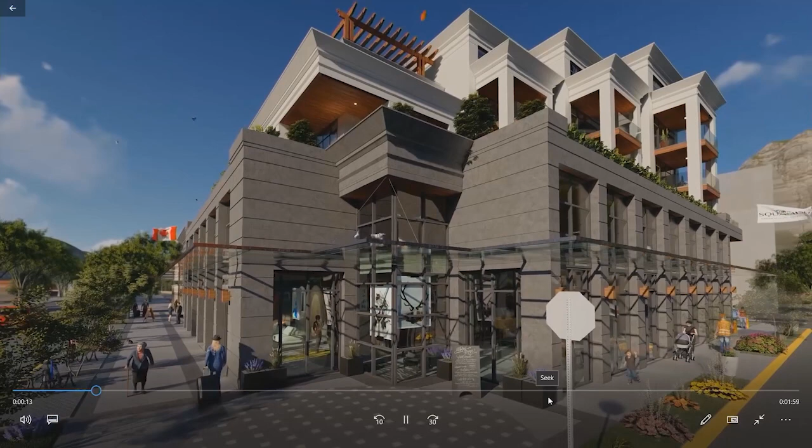This is an animation of what we had. This is the entrance of the building, which is a bit separate from the rest of the commercial. Units mostly have covered balconies. This is the top floor with some wood trellis. And this is the corner part that has a little intrusion with glass into it.

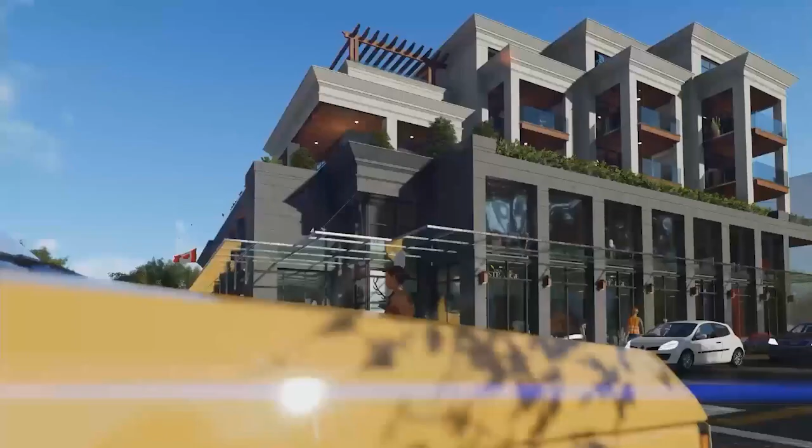This is the Winnipeg view, I mean the elevation from Winnipeg. And Winnipeg to Cleveland, you can see the corner and the entrance.

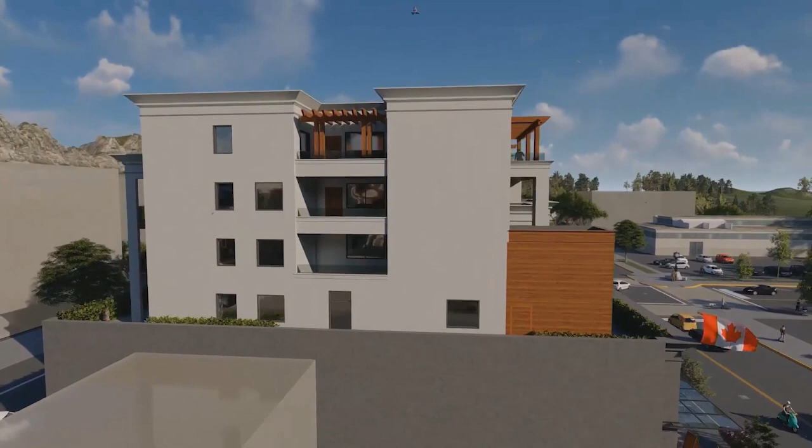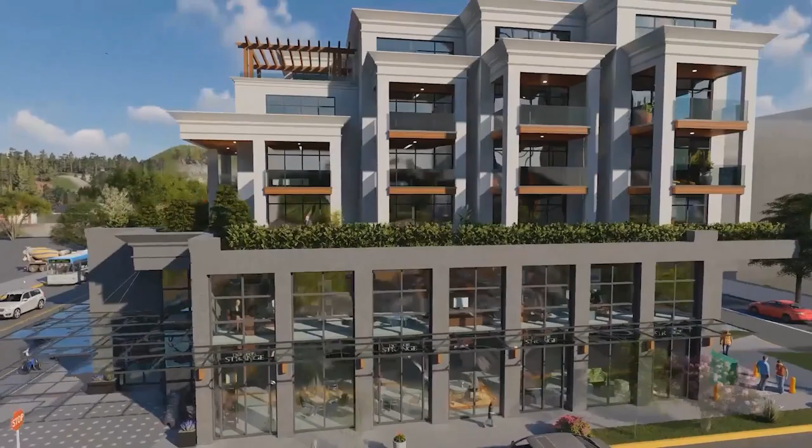Staircases are cladded with wood-like material. It's actually cementitious board, but it's textured and colored like wood. This is the parking, which has been covered with breathable green walls. It allows ventilation and makes it green as well, so natural ventilation for the parking.

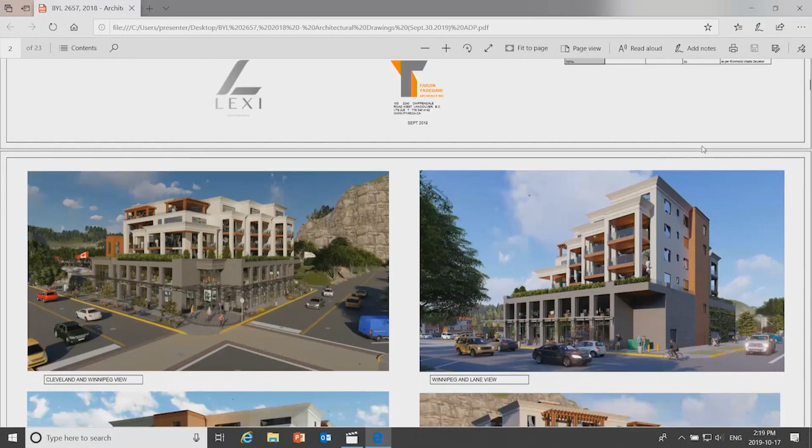I don't know if you need to go through this. This is the project data. If you need anything extra, I don't want to take your time. You have the perspectives and the site plan.

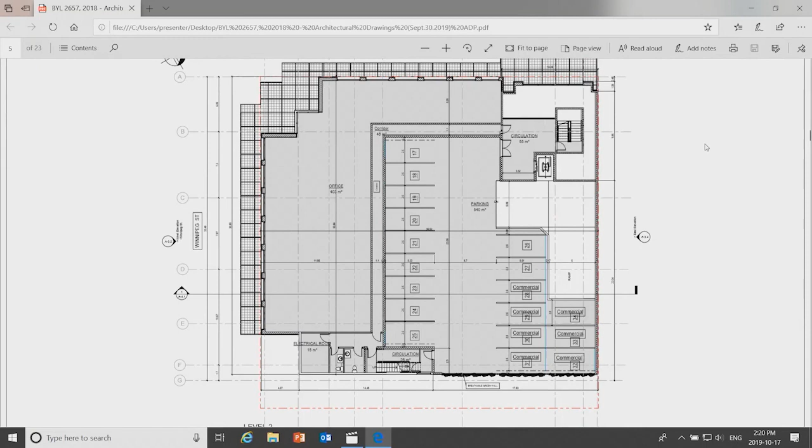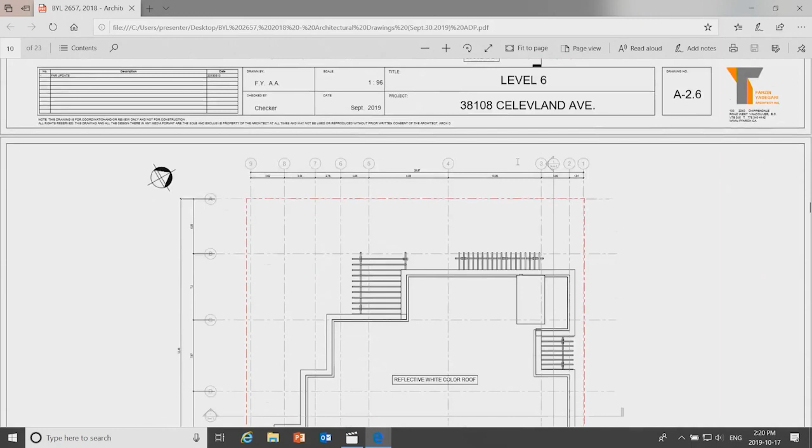This is the layout of the main floor, showing the commercial CRU and the parking, which is accessed through Loggers Lane. Upper floor has offices, units, and the amenity, the first immediate residential level over the parking. Basically we have typical floor plans on top, except for the very top unit, which has a larger unit. And this is the roof plan.

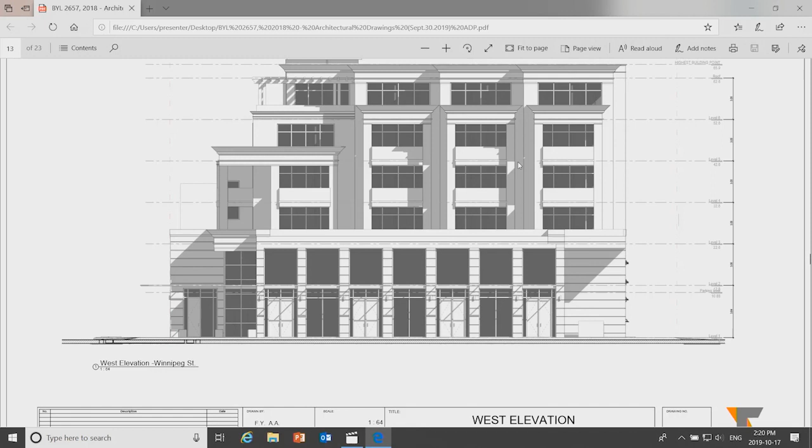This is the Cleveland elevation, with the colors, same elevation basically. Winnipeg, with the color. And this is Logger Lane, south elevation and entrances to the parking, with color. And this is the east elevation, with the color.

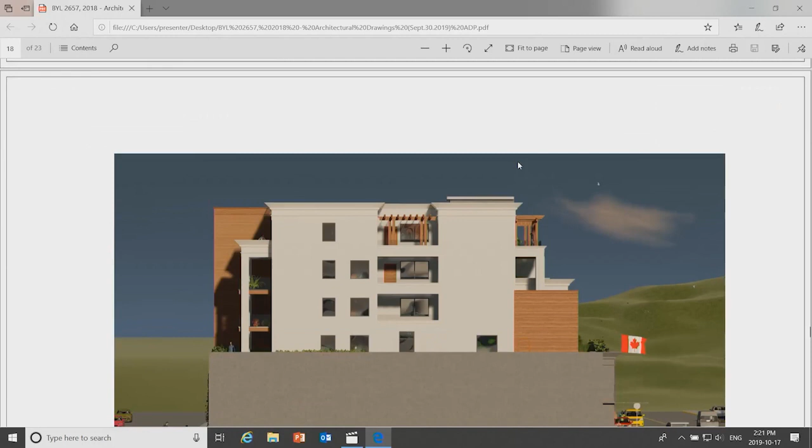A couple of sections. If I'm going too fast, let me know. And these are the colors and the materials.

The lighting, a bit small, but we have wood-look lighting at the street level with the sign. This is a bit too small, but we tried to enlarge it a bit, so it is continuous signage here, which meets the bylaw, with some lights next to each of the unit entrances.

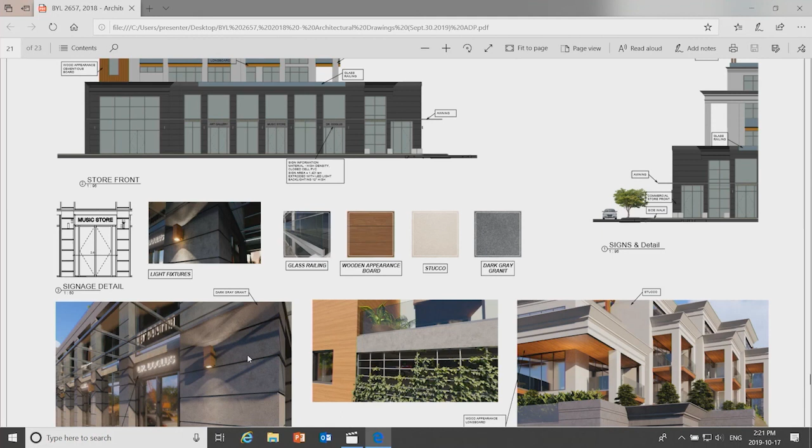Yes, the soffits are all wood-colored material, but you can only really see it here, you have to see it in the perspective. The soffits you can see in elevation, and it doesn't go up. Somehow the wheel doesn't work. Anyway, no, it doesn't go up, it just goes one way, I think. Where? Maybe here? No, it looks like it's just frozen. Do you want to just exit it? Sure, we can do it again.

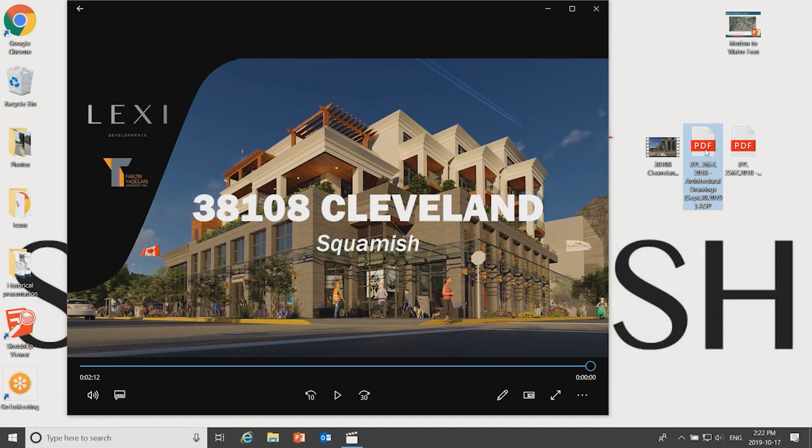Yeah, these are what Bob mentioned, the wood that we have. It actually shows a lot more in perspective, the soffits, on the right, top right. Right, all these are.

Anything else? Just some specifics about the 5 points. Well, but landscaping, let them ask questions. Yeah, this is basically to reply, trying to keep it.

I think we should also note that for the plaza, the landscape architect hasn't designed a final thing because we're at zoning, but our intent is to keep it flexible, because it might be that a corner tenant, like a restaurant or cafe, comes in and wants some seating. That's one thing. The second thing is we can keep the landscape, and as Farzin mentioned earlier, we're intending to have a public art piece, so there would be a whole competition following the district's rules on how we come up with the solution.

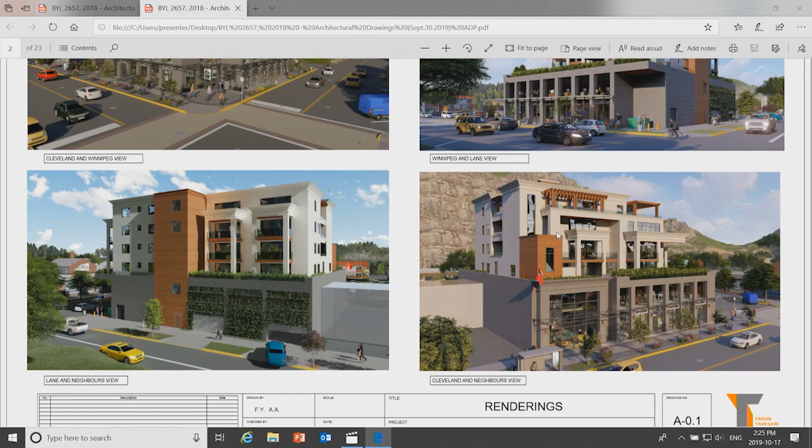I think that completes our presentation. Thank you. I'm welcome to your questions, please.

So we will have a round of questions. Start with you, Jenna. Sure. Could you speak a little bit more to the amenity space that's within the building?

Yes, absolutely. This is the space right next to the elevator, accessible to everybody, with a strip of outdoor amenity next to it. This is 54 square meters, and we can put a wet bar or kitchen next to it, or part of it may need a washroom so they don't have to go out. But this is what the bylaw requires, all one big space.

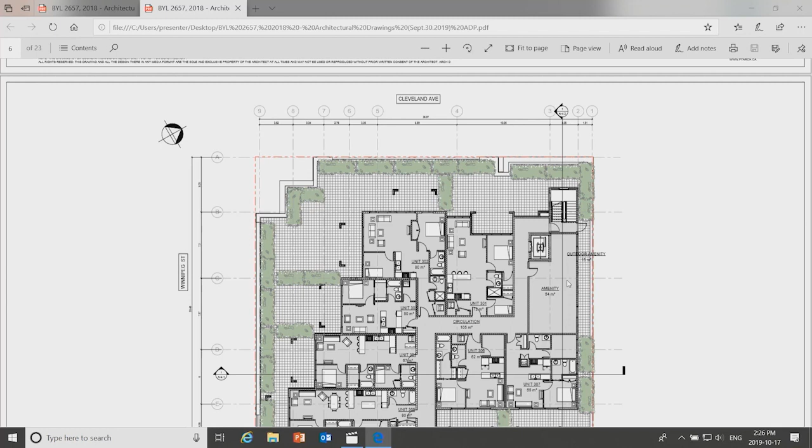I think the other thing we should note is that one of our challenges is that on Loggers Lane, when the owners bought the property, there was no registered right-of-way, so it was free and clear. Then, as they started to design, it was discovered there's a buried sanitary sewer that runs along Loggers Lane that's never been registered.

So that immediately, plus the hydro, introduces setbacks we have to deal with. In order to break up the architectural design, plus try to meet some outdoor amenity space, we created a portion 5 feet wide outside. So if you can imagine, on the outside, it breaks up the facade along Loggers Lane. That's one thing it does.

The second is that for an area to come out from sliding doors or whatever kind of doors, there's room for some seating or standing if there's a function going on in the amenity room. That's a good point. We had to increase the setback from Loggers Lane, based on discussion with engineering, to 3.72 meters, which is more than 12 feet, to meet the requirement because of the pipes that were buried and we were not aware of when we started the design. But the building has been pushed forward toward Cleveland to allow for that setback.

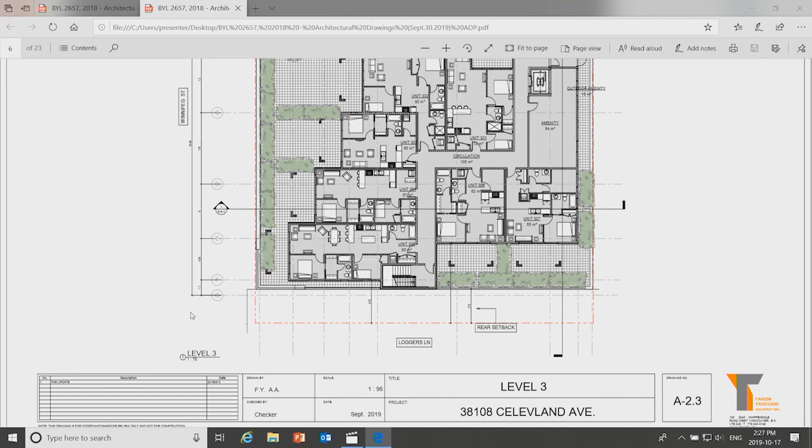With the overall form and character, could you speak a bit to the approach of having two quite different forms and characters with the top and the bottom, and the intent with that? Exactly, sure. The feel is, I wanted to have a very strong base, which is the commercial part, and then a lighter, more approachable residential feel above that plate. So I wanted a more formal feel for the commercial, and then more playful residential at the back.

Okay, thank you, no more questions.

Thanks. Can I just begin here with a question for Carrie? I'm feeling like it's very presumptive that we're looking at this site as a C4 site before it even goes to rezoning. So I'm just curious, having advisory design panel going into such small detail as amenity and whatnot, perhaps we should be looking at this street on a wider scale and commenting on density and massing, how appropriate or inappropriate that is for that corner, and whether or not this is even going to get close to a C4 or possibly a CD zoning as it goes through process.

But looking at the small details right now, we might be wasting a lot of time, so. The applicant has applied for rezoning to a C4 zone, so it would not be a CD zone at this time.

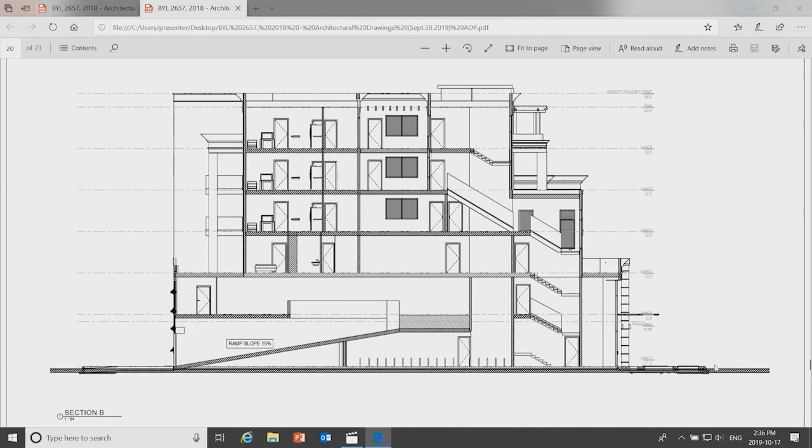Could you speak maybe to the granite, why the choice? I sort of feel that it's apt because of the old rocks that we have, and it feels somehow strong and durable, and reminds me of the rocks around here.

The wood trellises, do you think they're appropriate? That was part of it, to tell you the truth, in response to the bylaw requirements, and I felt it gives a bit of a softer look to the building at the top. Just discussion, I mean adding some wood, I think it helps soften the building.

The way the building is massed and stepped back creates what I perceive as a haphazard ratio of patios. Some seem to be covered, some not covered, some seem to be 1,000 square foot, some to be 2 foot wide. Could you speak to how they're divided up? Yes, these are actually all typical, an equal rhythm. Most of the decks on the lower floor are covered, except the very top floor. Could you show the plan? Yes, absolutely.

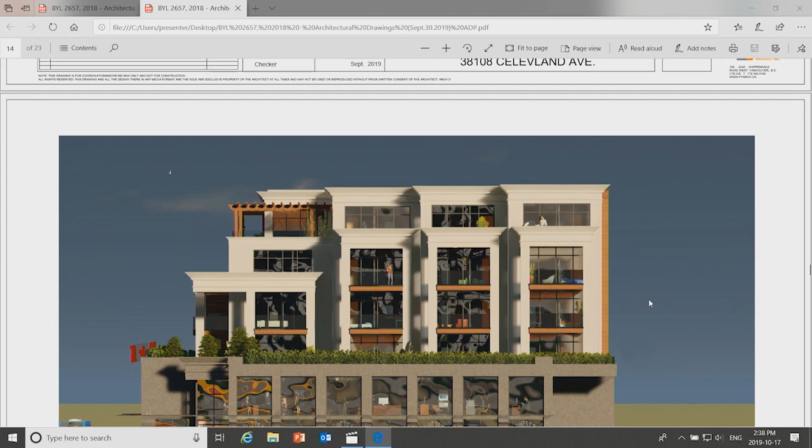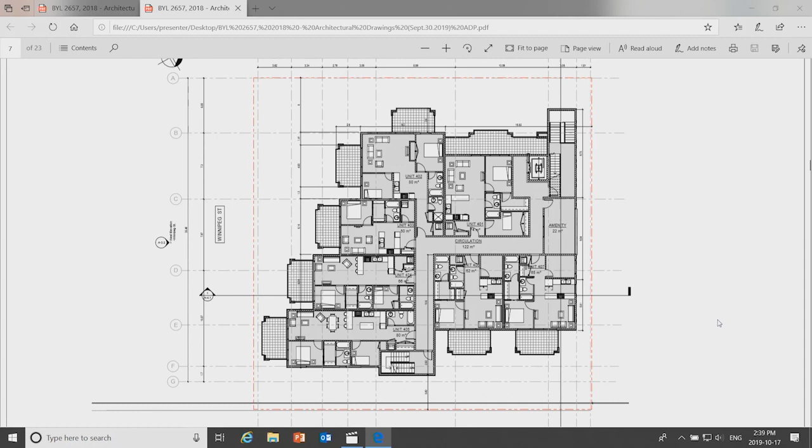This is the top floor, but this is the typical floor. So the units have decks that are covered, and the corner unit has a bigger deck. Maybe I should go one floor lower and see. Okay, here. So we have 2 units toward Loggers Lane with the deck, then 4 toward Winnipeg, and 1 at the corner, and only 1 toward Cleveland. It was basically trying to recess because of the corner. That was the goal.

And then could you maybe speak to the green credentials? You noted that it's going to be a steel building. And it's green. Does that mean it's spray foam?

It is not 100% finalized. There was a discussion, it's a good possibility to become light steel structure, and I have done it before. There was always challenges with condensation more than fire issues. The fire issue can be dealt with more or less. My concern is always with condensation with steel, especially with cantilever balconies. But we don't have cantilevers, we have posts, so I can somehow have the thermal break. But it's an issue I have to deal with because that's one of the requirements of the client.

Okay. Yeah, I have no more questions. Thanks. Graham? Oh, sorry, can I, Carrie?

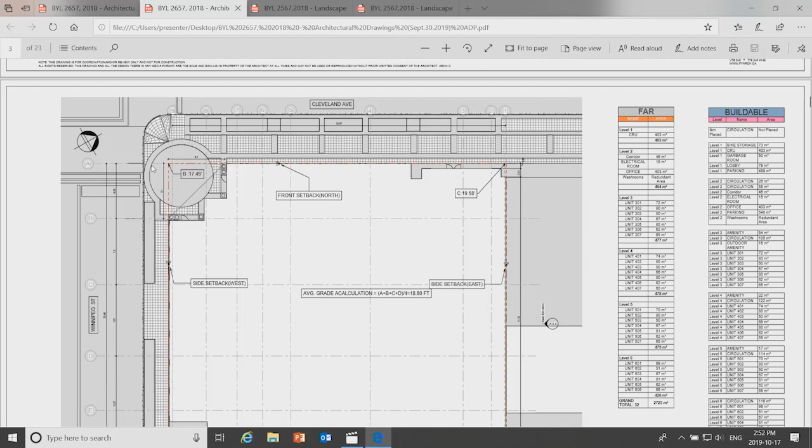I'm trying to find the dimension - this is about 9 meters across, almost a 30 foot diameter. And that's not taking into account sidewalk allowances? Yeah, it does, it was always factored in. So everything is about 9 meters. And there is an opportunity there - I know there's glass, but certainly in projects I've been involved in, you can go right up the building, either with tiles or something, and that would be part of the discussion.

Thank you, I have no question. Okay, thanks Sarah. Carlos?

Can you let me know, for page A6.1, the shadow study, what software did you use to model that? Revit. And do you have Squamish's topography data? Yes, absolutely, it's almost flat, but we did use it. I mean for the surrounding mountains as well - yes, that's right, we did, this is exactly what the mountains are there.

Maybe a question for staff - as far as I see there are 2 DPA guidelines we're talking about in relation to the plaza space. Could you elaborate a bit on your first point that it doesn't meet the guideline? Looking at the two guidelines referenced, if it's the size - the 9-meter size stated - is there something saying we need more, or can the district require more, or is it more aspirational that the plaza be larger from the district's perspective? Yeah, so there's a whole section under 3810 on corner plazas.

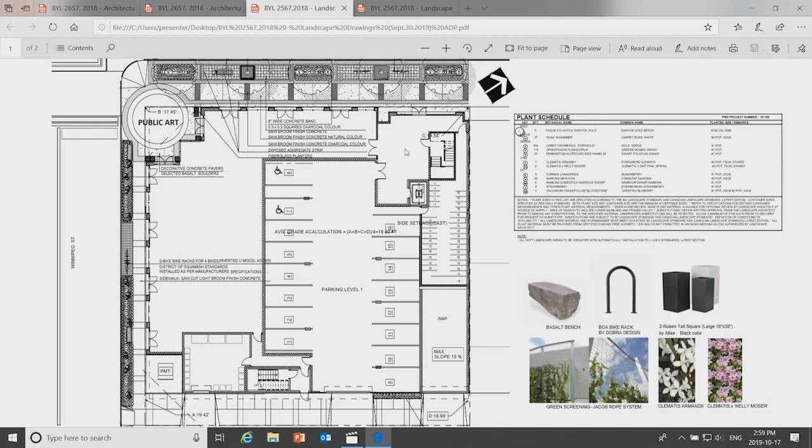Okay, and then you also mentioned that the public art plaza could also possibly work as cafe seating or something. So I'm just curious how that will work, how you would maintain it as a common area if it's being used by a private business.

I don't know if legally it has any issue with that.

Normally what would happen is you do a commercial strata for both the offices above and the retail at grade, and that'll be common area because it's on private property. So anything that's put in, whether it's art or a lessee for a cafe putting out seating, there'd be a restrictive covenant, and there'd also be within the strata bylaws who looks after it, making sure it's clean and everything's removed for nighttime and so on.

And would that preclude it from complying with the development permit guidelines then? If it all of a sudden isn't common, it's now private? I mean, the idea, if I understand correctly, is to animate the street, and that's one way of doing it for sure, is to have outdoor seating.

I can speak to that a little bit further, let me just refresh my memory on that. I can ask my other question. Sure, go ahead, that's the last one I think.

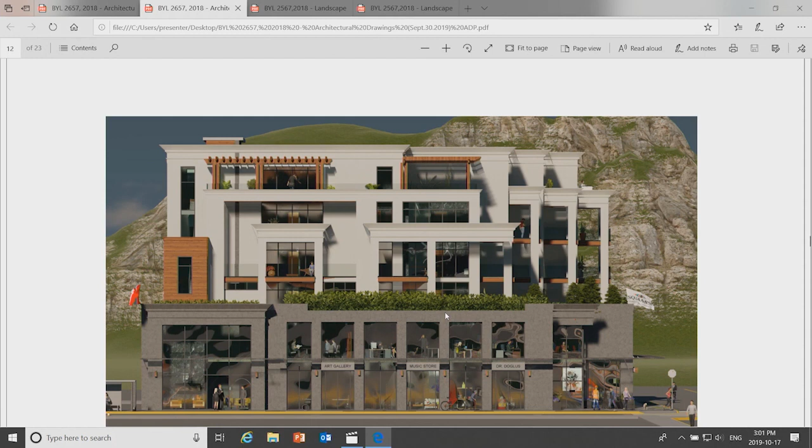Okay thanks, Carrie, did you want to add in? Yeah, so we do have a guideline in our development permit guidelines, 3811, privately owned public space, and it speaks to privately owned public space should have a public right of way registered on title to ensure public access at all times. So we do have that, it's a guideline, and we've used it in different cases where it's more applicable. At this point it's something we haven't considered for this, but it could be.

Okay, so it'd be something to consider. I have one more question. Is there any consideration for employee housing or employee restricted housing here for the residential, or is it all market? Condo?

Okay, I'm not going to ask any questions because I've already asked my main question. So we'll go to comments, and I'm hoping that we can move around the table a little more quickly this time if possible, and we'll start with Jenna.

So for form and character, you had mentioned you were hoping your building would stand out. I think there's a really lovely vernacular being developed in Squamish, with a lot of great buildings we can look to. Unfortunately, I think this form and character is very different from the Squamish look. It feels more California than Squamish, and I would encourage as this project moves forward to look at a form and character reflective of Squamish, finding a creative individual voice while still maintaining the form and character that's been created in the district overall.

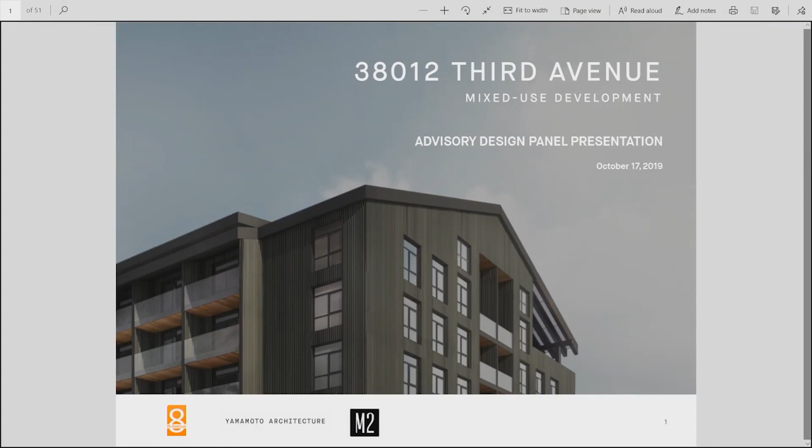The development is proposing multiple variances. One is to increase the height of the structure by 1.09 meters. They are also looking for -- this percentage is a little off because they've changed it -- a reduction in the commercial space from the required 20% to 8.8%. No loading bay, a parking variance of 3 commercial stalls. They are also looking for this panel's review on whether they should have an indoor and outdoor amenity space, which would require a variance, or a full indoor amenity space as per our zoning. So they wanted your comments on that.

Due to the development's 100% rental dedication, the project is considered a priority project. Under our district priority project policy, they only have to come to ADP once, so this is your chance to comment. This project has not previously come to this panel before. Staff are generally supportive of the design and are seeking ADP's review and recommendations regarding the proposed variances and the north facade material, the massing, and the overall building massing in relation to upper story setbacks.

We have a lot of development permit guidelines. They are guidelines, but a lot of them do not speak to the elevations and massing proposed here. So we want to get ADP's comments and feel around which guidelines are really important to follow and which ones we're okay not following.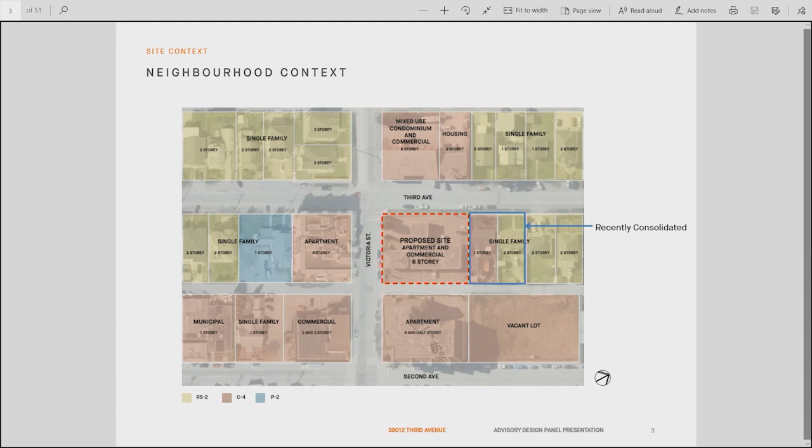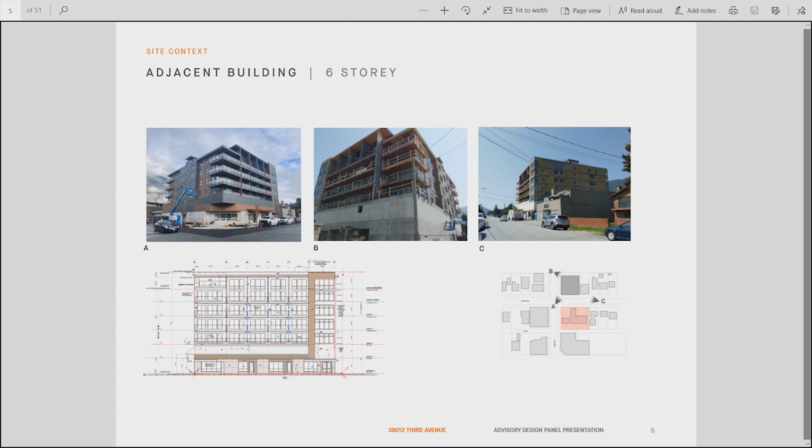This is the building across the street, also similar scale, flat roof in this case. When this building was done, there was a slightly different qualification on height, and height could be extended with additional energy performance, so that was done in this case, but that's not really applicable anymore.

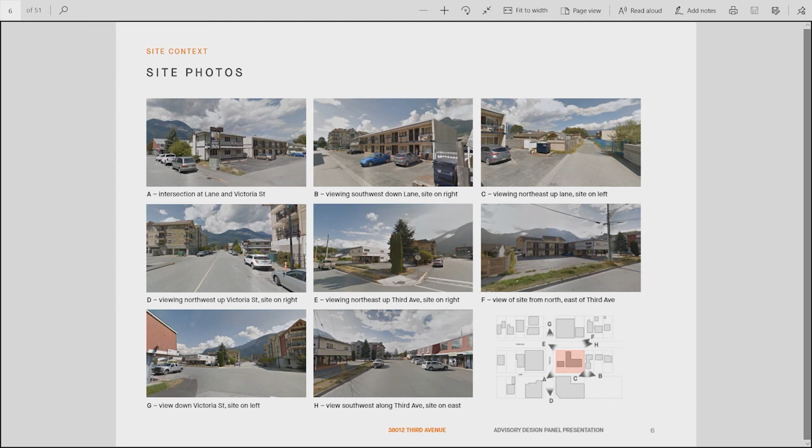Again, just some context - the incredible views even from street level that are possible here. We do a lot of projects in the Lower Mainland, in Vancouver, and Squamish - the history is quite interesting, but also the requirements for the floodplain and the difficulty in doing below-grade parking.

So for us, this suggested an opportunity to think of the building differently and go to Squamish's history as an inspiration - this idea of the mining and the forestry that helped found the city.

Our diagram was that something has to come out of the ground to support the parking and the commercial - that's our concrete base, the mine notion. Then the mill is the piece that sits on top, the wood frame construction, the simple form.

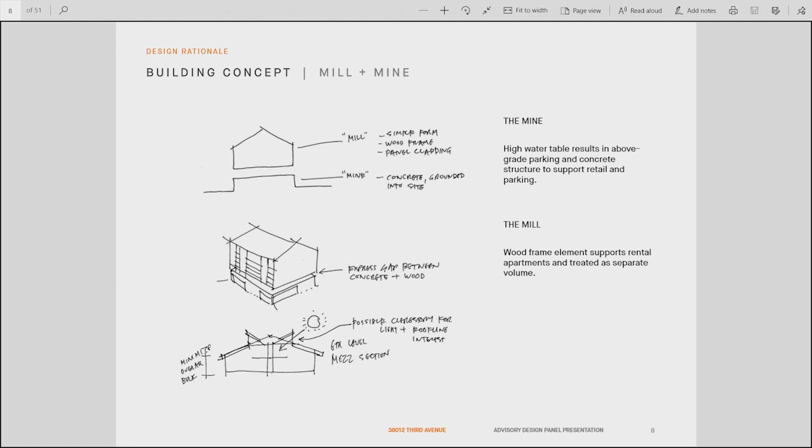It allows us to separate the volumes and articulate them because the functions are different, the construction is different. We feel a simple form is appropriate because it's the most efficient building envelope, and it brings back that pitched roof form, which is more of the historic base of Squamish, but also bringing in a more contemporary language.

The materiality is very important. The concrete is expressed as concrete, board form, so there's texture and richness to it. The Corten steel refers to the old ruins, the rusted tools, the artifacts of these areas, and wood is used as an accent material. The main building form is a black or dark gray corrugated, which creates a quiet, simple form, expressing the form and allowing those other materials to be accents, giving the building richness.

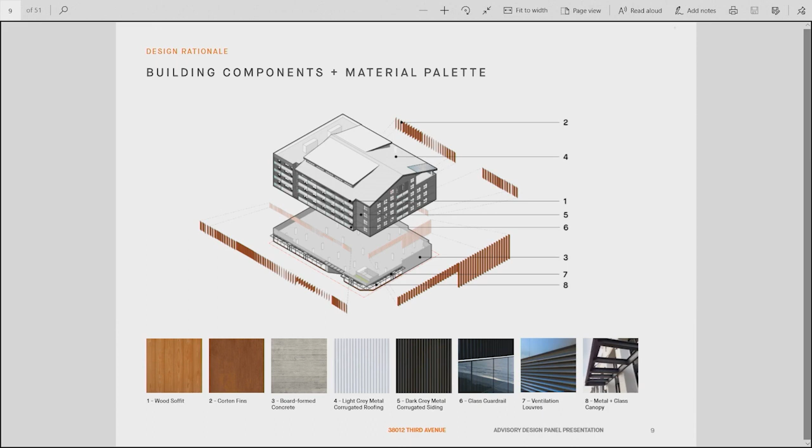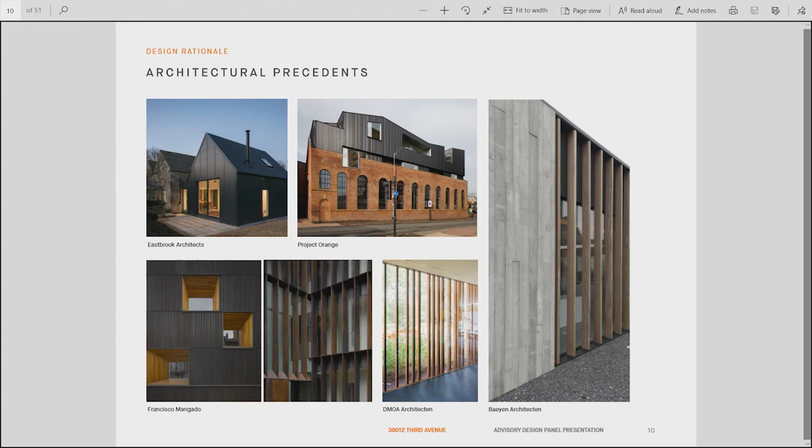This is our precedent - simple forms, very simple detailing, robust materials, but the combination is what gives it interest.

In terms of our site plan, to the north is Third, so we try to wrap the retail as much as we can around the streets. The lane is on the bottom of the page. Even though the retail area is not extremely large, we are trying to maximize its frontage, and the residential entry is tucked in off of Third Avenue.

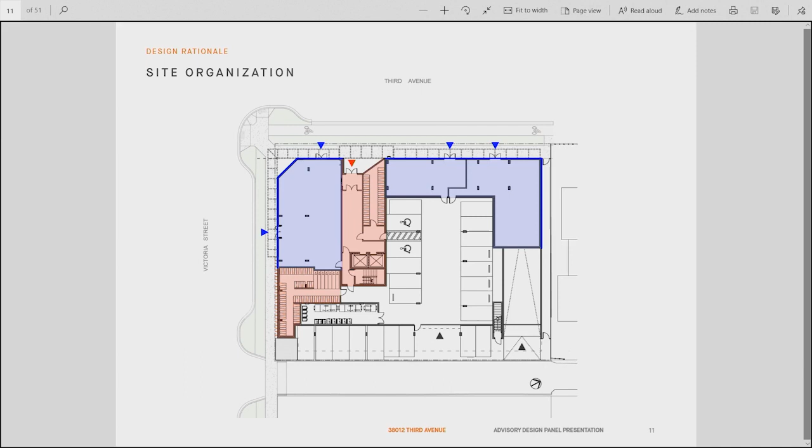Just a bit more detail - we are providing the city required streetscape, including the boulevard, and a bike lane would be incorporated as well. To highlight this notion of this walkway, our intent here is to avoid another variance, so we are setting that back, but it's not intended to be public. It's a maintenance pathway, but it's also one of the few places on our site where we don't have building, so it is a place where we have permeability.

We could potentially locate some of our stormwater detention in that zone, but it's not intended to be public - those gates on either side would close that off. It wouldn't be a thoroughfare, but it would also allow access for window washing on the upper floors and just general maintenance.

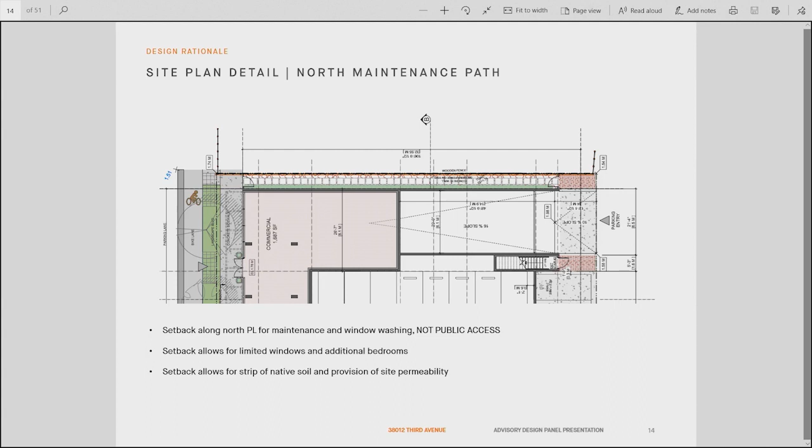So on the second level, again, because we're trying to maximize units, we have to fit our parking. We have a second level of parking above the retail. And then we get into the wood frame floors.

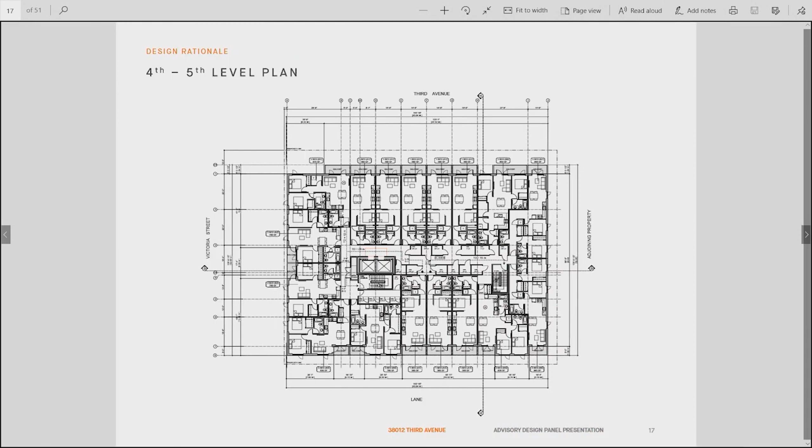Wood frame construction on the 6 floors, the shear walls, the stacking is really critical. We're also trying to make use of the depth of the site by having more studio-type apartments, so we can bring the unit sizes down, make them a bit more affordable, get more units, but also keep the form simple. And then, of course, the 2-beds, the larger units, are around the corners where there's more exposure. 4th and 5th are a similar plan.

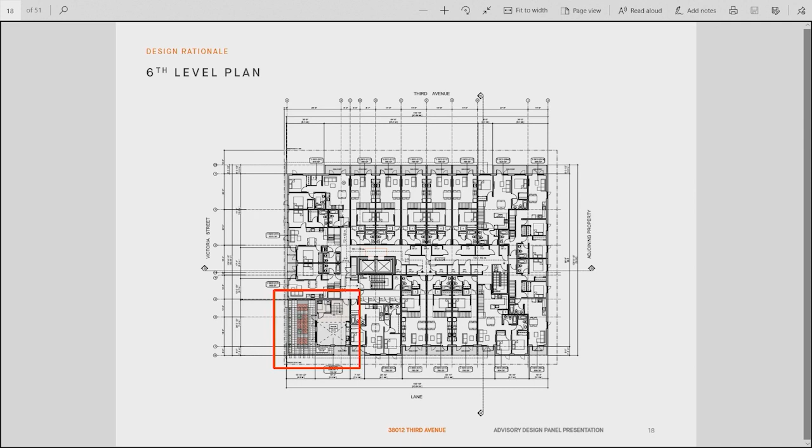On the 6th level, on that south corner, is where we're proposing the indoor-outdoor amenity. That's where the building carves away a little bit to express that, but we'll describe that in our variance request. On the 6th level, we're proposing a mezzanine, which allows us to create 2-bedroom units where those 1-bedroom stacks are, maximizing the building volume to create more bedrooms and more units.

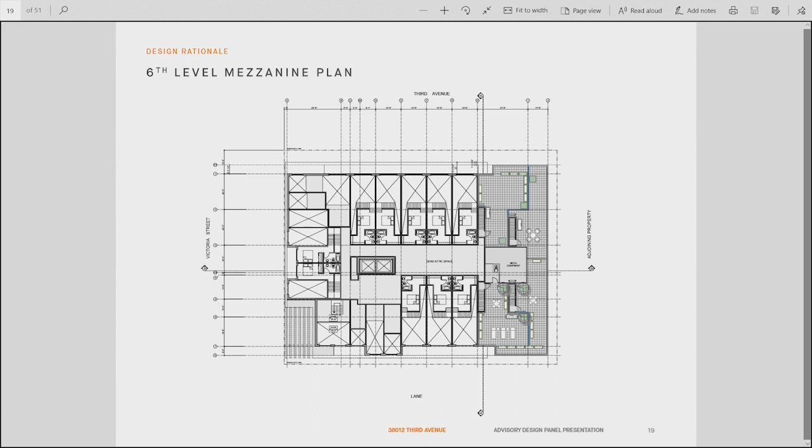And then on the northern side, on the right side of the page, is where that pitched roof form stops and it allows us to step down to help our transition to the neighbor. And so you can see that in the roof form here.

So the elevations kind of express that mill sitting on top of the mine, and then this Corten, rhythm of Corten steel fins, which create some warmth and also interest in terms of shadowing, screening for the parkade.

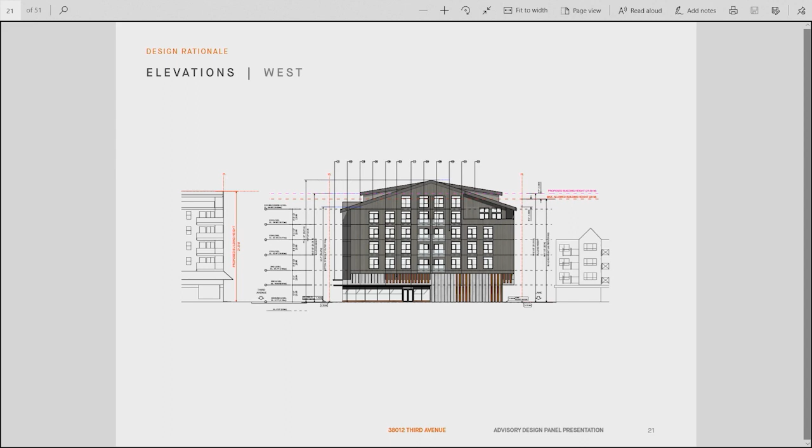And then the frontage on 3rd to show the extent of the commercial. These drawings differ a little bit from what's in your package, and now we've shown the gate to show that that frontage is actually continuous to the property line. So that's the intent - the intent is not to have a walkway.

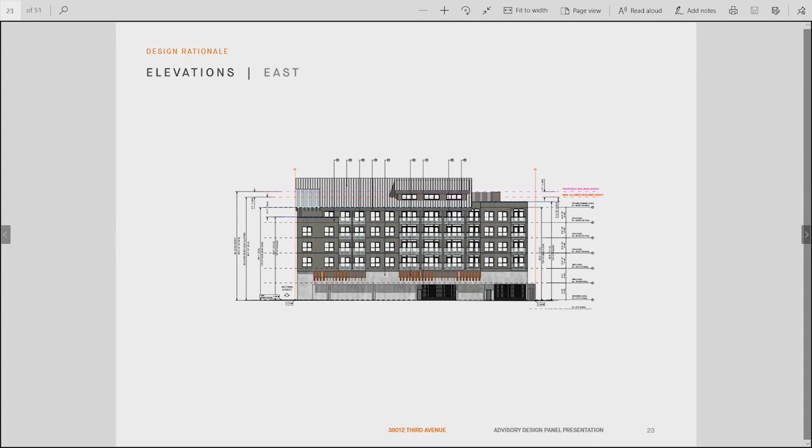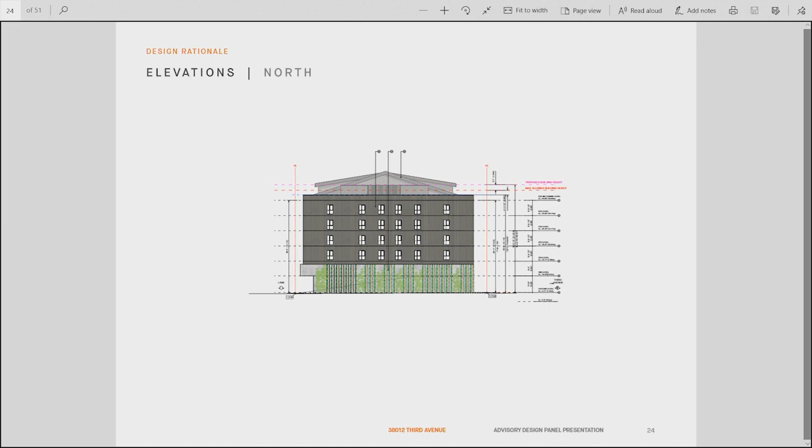And then the lane side. The north side is quite simple, but like I say, we are expecting a development to happen on the other side. The blank wall would be planted - again, we have that permeable area to actually have in-ground native planting, so we would propose that the planting could help to screen that wall in the interim.

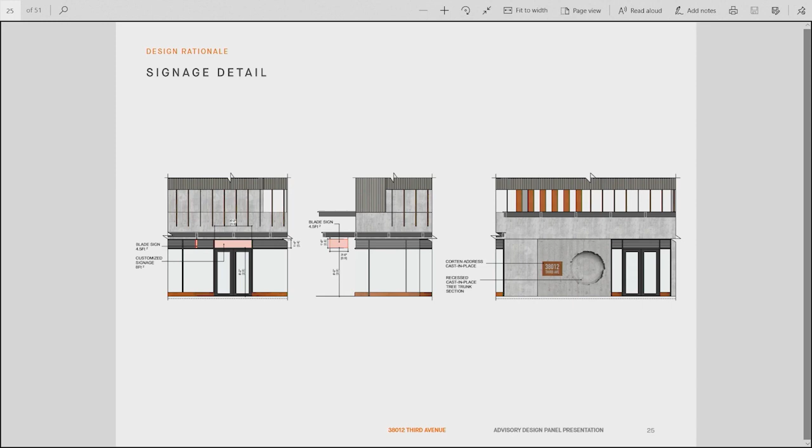And then just some notions of signage and how to make the entry a bit special. What we're thinking is we could have a giant cut of a log section that's cast into the concrete, so you have the board form pattern, but then you also see the rings of the log imprinted into the concrete. Then use the Corten material and signage for the building, but also for the shop.

Signage - so lighting would be a combination of essentially step lighting set into the base of the building, so it would illuminate the sidewalk, with a few areas of uplighting for features in that entry area, and then on that piece of Corten wall opposite the bike facility - oh, there it is, in this area over here.

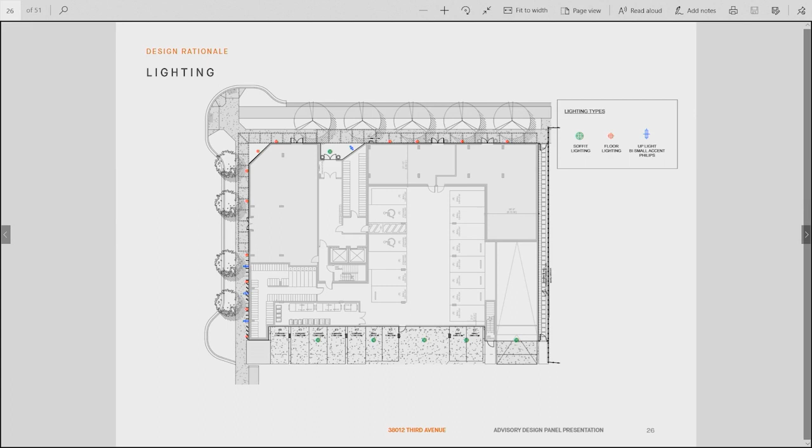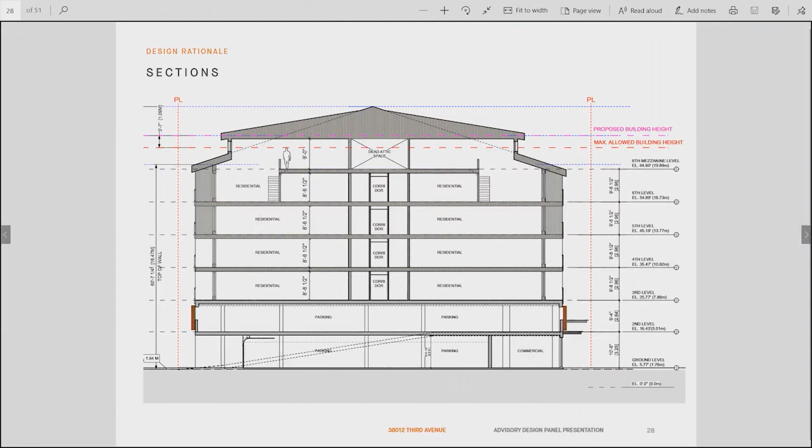And then just a detail of the entry area, and bringing the Corten also as an accent into the base of the storefront.

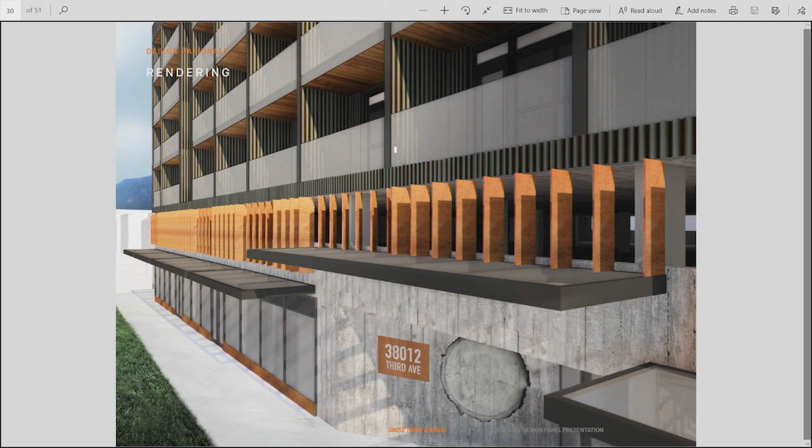In terms of sustainability, our team is very experienced.

They've built Passive House, done a lot of purpose-built rental projects, as well as LEED projects. We were also involved in one of the first rental LEED projects in the city of Vancouver.

We're not committing to Passive House designation here, but I think the principles of Passive House will really guide us in terms of continuous exterior insulation, air tightness, simple building form, and airtight HRVs. We're also looking at mass timber possibilities.

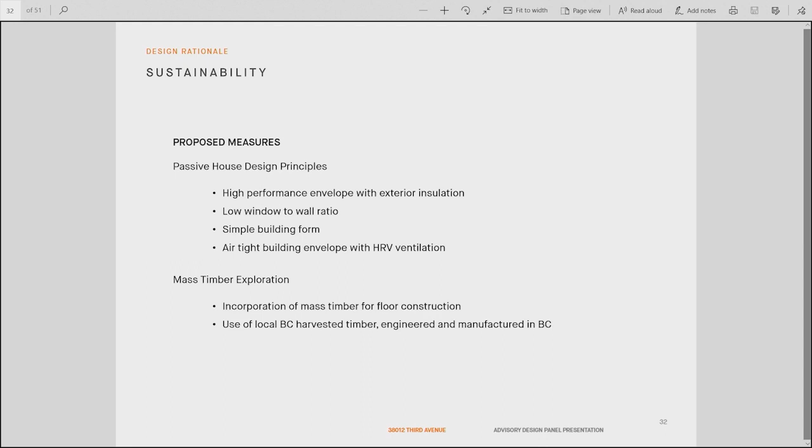CLT floors might be one option, like hybrid stick frame with CLT. We've done one rental building in Vancouver that used that approach, and it was quite effective because it was very quick. The CLT panels fly in very quickly, the workers have a surface to work on, and it's a much safer process as well.

Right now our energy model was based on meeting the Step 3 code, but we're exceeding it, and the model is based on some conservative assumptions right now. So as we test it out with our better envelope exterior insulation, our percentage better than the step code will increase.

As mentioned, HRVs. One other interesting thing about the approach of having the parkade on an open area on the second level is we can leave it open and ventilate it naturally. We don't need to mechanically ventilate it. Also, we can reduce the material required in that zone by leaving it open.

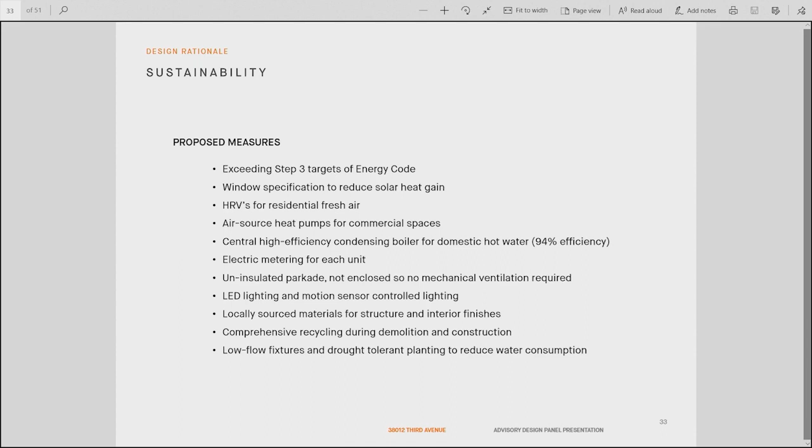Our standard LEED guidelines cover recycling and waste management, low VOC compounds, and low flow fixtures to minimize water usage. Right now our performance is 6% better than Step 3 in terms of total energy use, and 16% better in terms of thermal energy demand.

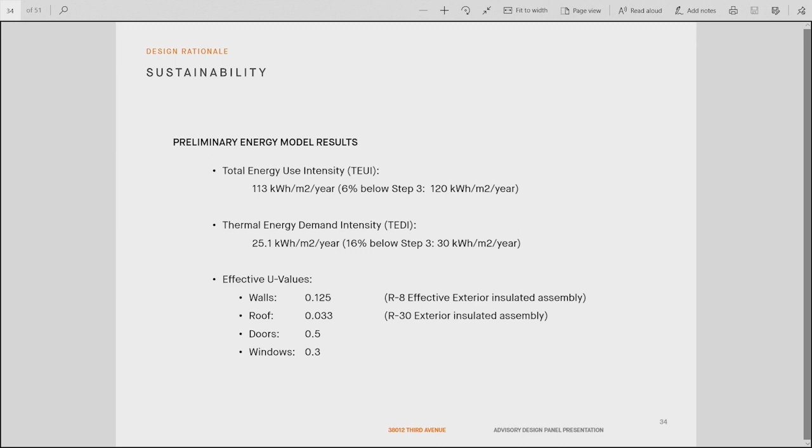That's based on R8, and we're looking now at R12 with our latest wall assembly with continuous insulation on the exterior. So quickly, let's run through some of the variances we're asking for.

Again, our purpose here is rental, so we are trading off some of the retail depth. This is a transitional area, so demand is more for the smaller office type use, which is what we're proposing, and that type of use doesn't really require loading. Again, we're trying to maximize the frontage of those storefronts, so the streetscape is still an active streetscape.

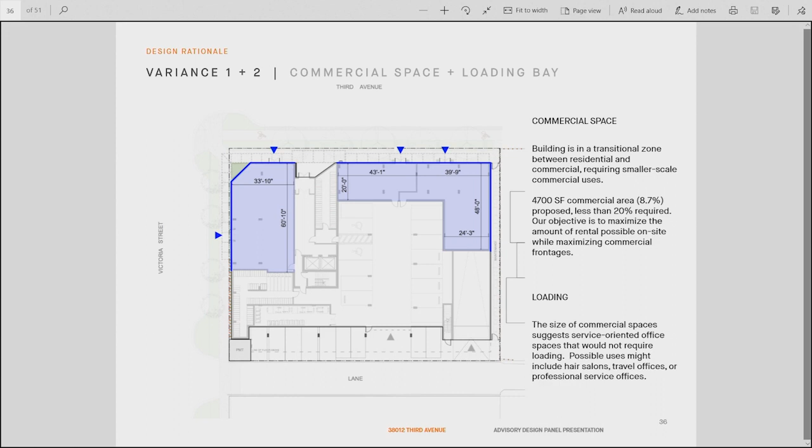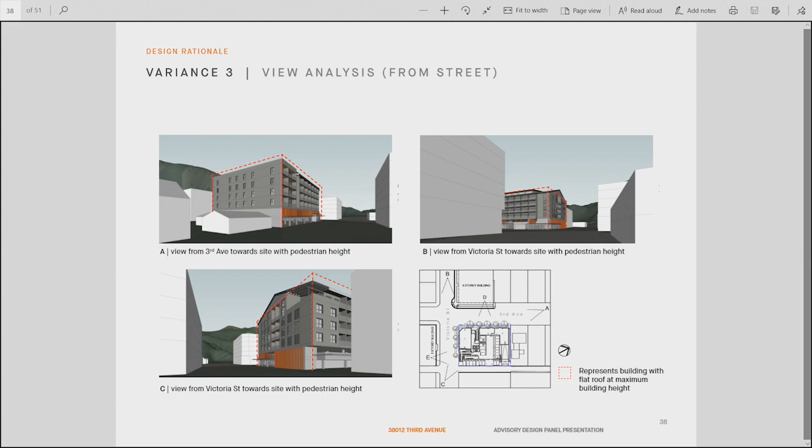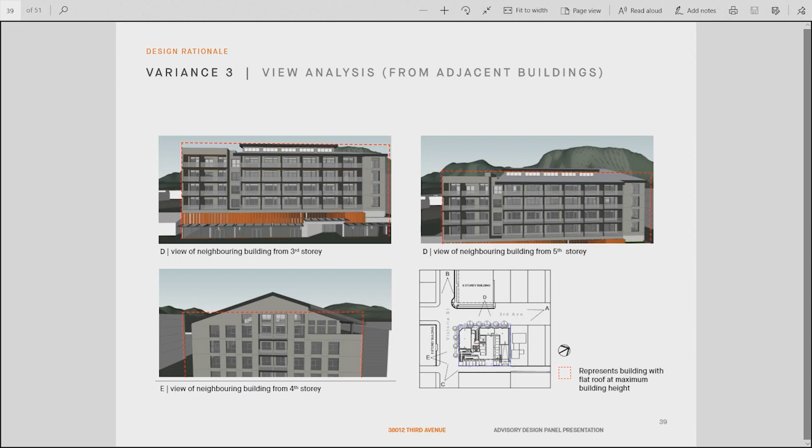Height we touched on, and because of the eave being pushed down at the side of the building, the apparent height is actually less than what's possible under a conforming building. That applies to both the public realm and the neighbors, depending on which floor you are. Of course, that one end of the eave will be taller, but most of the building perimeter will be shorter.

Shadowing as well, because that step down is on the north side of the building, our shadowing is less than what would be possible with a flat roof conforming building. So from a performance point of view, the height doesn't have a significant impact.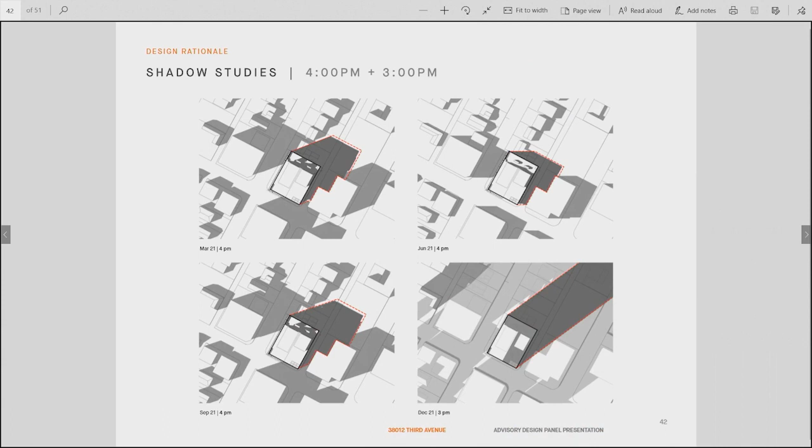This is one of the questions we're posing. We feel like the indoor-outdoor amenity is a nice feature. It's consistent with how people live in Squamish and the indoor-outdoor connection. It also, in this case, helps carve out a piece of that volume and add some interest on the building.

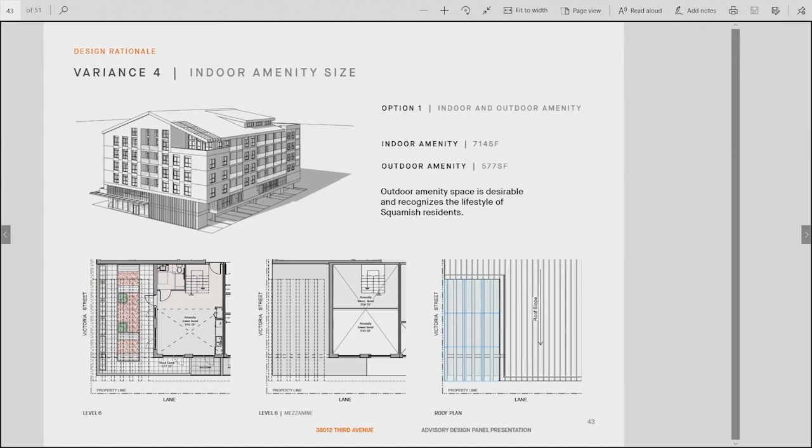But if that is not possible, we can make it work as a purely interior space without a variance. But we feel like this is a nice feature. It could be a nice gathering space, especially given some of the units are a bit small, so the public communal aspect of this, I think, is quite important.

Parking, again we mentioned the numbers have switched around a bit, so now we're asking for a 3-car relaxation for the residential. Although with the way motorcycles are calculated, we only count 50%, so we actually have 67 vehicles for 67 units. We would also propose electric charging for the motorcycles, as another incentive for people to use those stalls.

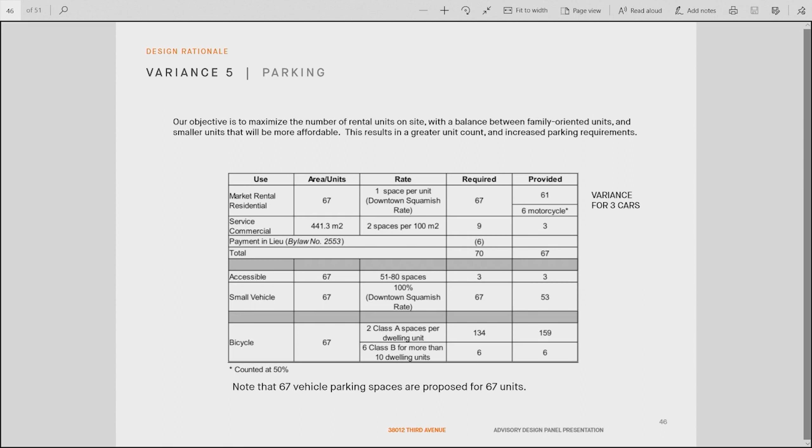We've done a traffic study, and this is a very walkable area. There is transit, and more people with rental are not using cars — they're using car shares and ride shares. So 3 cars over 67 units we feel is a pretty small ask for this rental.

And then just a detail of how these fins and the canopy work. The proposal is that the fins would have different orientations, creating another layer of interest on the facade and shadowing.

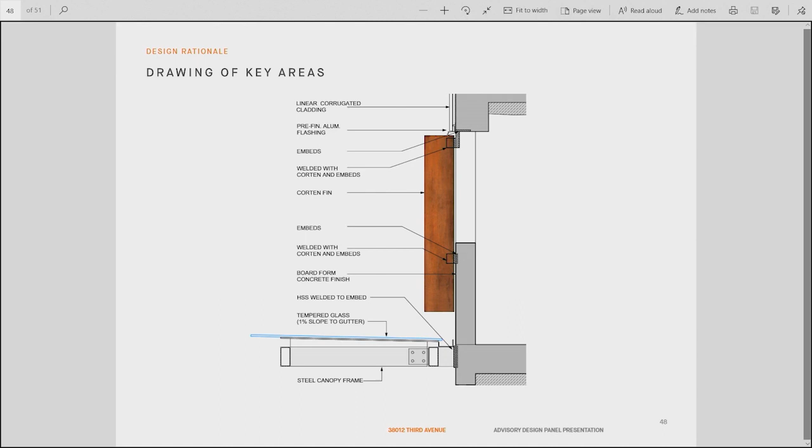I will give you a rundown of the landscape design. We've been very lucky in that I've been involved on a project that's actually just completed on 3rd.

We've been able to coordinate with the city for the new paving patterns and urban design occurring at the ground plane. That includes 5-foot square tree grates, charcoal square cut concrete, broom finish against the face of the building, with banding of charcoals going across.

This is exactly what we're proposing in this project as well, both on the Victoria side and the 3rd side. On the 3rd side there's more uniqueness with a bike lane that runs through, and a corner plaza where the bump out is. We wanted to separate the bike route from the pedestrian area, so we have planted strips with street trees in between, which adds extra interest and green on the 3rd Street side.

That will also help. We're going to be using absorbent soil depths, so 24-inch or 600 mil soil depths, and structural soil for the requirements of the street trees themselves.

We have a small paved area on the intersection to the left with a bench and seating, and we'll coordinate with lighting to ensure that area is lit as well. It's a bit of a larger area. We also have bike racks incorporated into those spaces, so it adds a lot of activity and amenity right at the corner that draws people down.

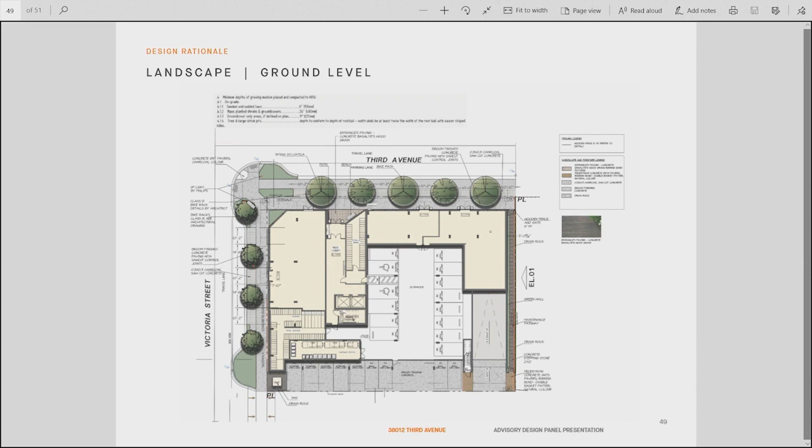And mixed seating - we were envisioning it as almost like a benched communal area, like a gathering bar space, if you will, that people could go into and actually interact and learn about each other.

In the space that's in this area here, we were treating it more along the lines of individual spaces that people could use for separate gatherings, and I like to provide separation between these spaces. So the seating and planters in this location are more geared towards providing opportunity for separated space in individual small groups of 2 to 4 to 6 maximum, with some screening and separation for privacy and individual uses of these areas.

We've been back and forthing about the furniture, whether we wanted to provide some custom furniture that could provide opportunities for interest and wood, providing some of that timber that would draw it back to the architecture again.

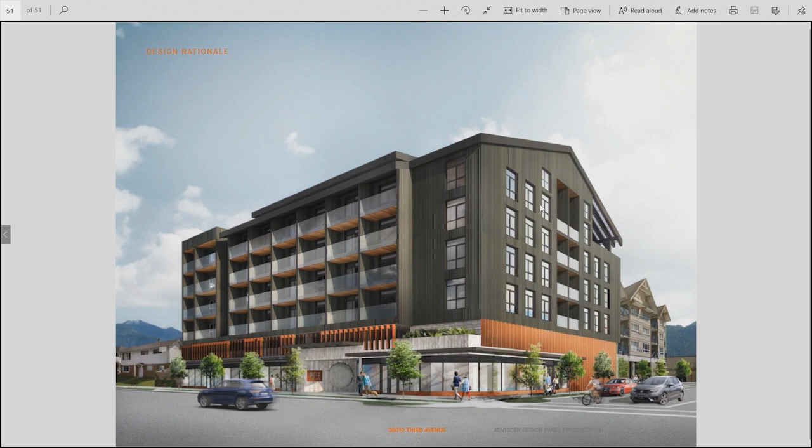The surfacing is going to be pavers, and for durability we have a color palette noted on the plans as well. On top of it, in the rendering you can see this is the front lower amenity, the upper amenity here, and on the back side is the larger amenity. That's the last one there.

So that is a very short part of the landscape, and then if you want to have any comments for sustainability as well.

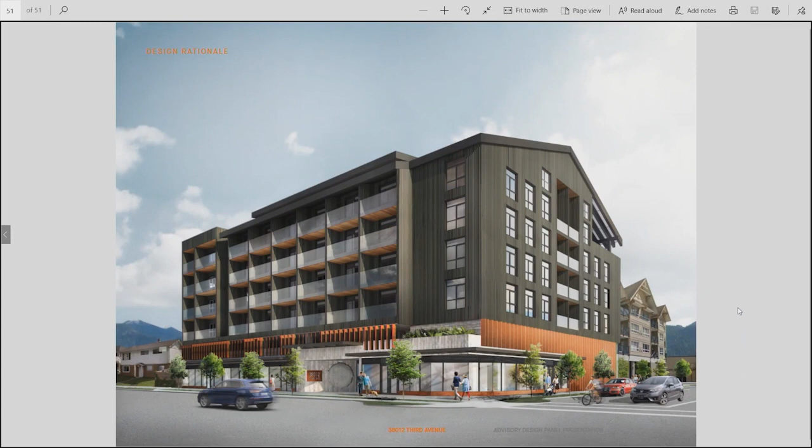Just a couple of comments on where this comes from. We consider ourselves a socially conscious developer, and our contexts are always building community, sustainability, and livability. So we take these variances quite seriously. We thought about them.

As we approach this building, it's about the necessity of rental apartments in the city of Squamish. Last year there was a 0% vacancy rate that CMHC published. So there's a variance on the commercial space—the only other spot to put that commercial space is at the expense of the residential above. We'd have to go up one floor and make that a commercial level, which takes away the need for rental. So that was our context here.

We've also built the largest passive house in Canada—an 85-unit rental apartment building in East Vancouver, at Hastings and Skeena. That facilitated the City of Vancouver's current green building policy, where if you rezone, you strictly have to do LEED only. This facilitated them to now take it to passive house instead, if you need to do rezoning. So we consider ourselves a leader in the country on that.

We built a co-housing project, a 31-unit co-housing project in East Vancouver, which taught us about circulation and flow, and how to create interaction between residences—that's what we took into account here as well. And then livability: trying to get efficient units, sufficient services and amenities around there. We also took parking into account.

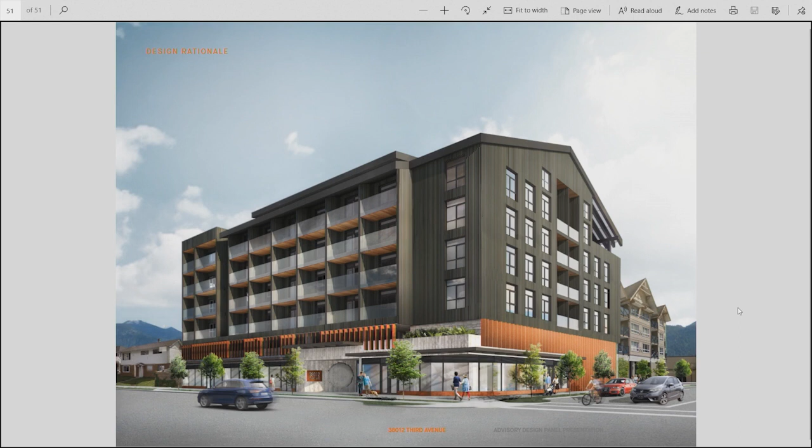The roof is proposed to be a light colored metal roof, and our concern with heat island is mainly in the summer, when it's hottest and the sun is highest. We feel the darker material for the walls creates a nice contrast with the concrete base and the accent materials, but the roof itself would be very light colored, so the sun wouldn't be absorbed.

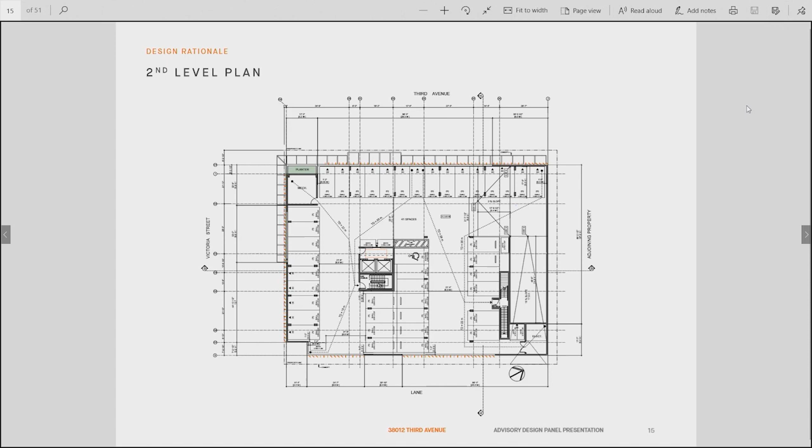Can you tell me about your adaptable units? So currently we're proposing 7 adaptable units, and our guideline has been the Vancouver requirement right now. So we provide additional clearance in front of the toilet and sink, the doors to those bathrooms open out, and the bathroom fixture plumbing is on the opposite side than the toilet, so somebody can operate the shower tub without having to reach and get into the tub. Also pre-wire the doors for automatic openers at the main entry. And with the space allowance from the Vancouver guidelines, it's 750 by 1200 millimeters, which is from CSA guidelines from 2004. So they've extended and increased their size requirements now, so it might just be a consideration.

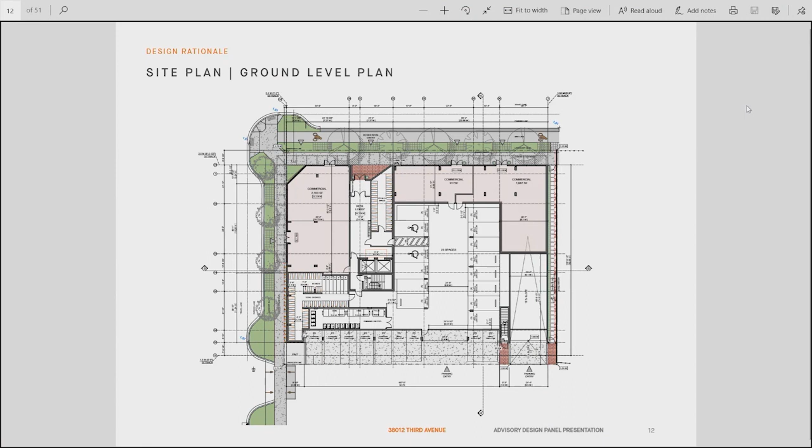That's understood, it's also off-site, so that's partly district. Is there a requirement to do that? This particular corner is not one of the corner plaza areas, so it doesn't have to comply with those development permit guidelines. We would just look to best practices for streetscapes, ensuring there's amenities like bike racks and seating and things like that.

There's no residential cooling in there, and with the dark facade, is heat absorption a consideration at all? Our thought is that because we've got insulation on the exterior, that's going to keep the heat out, and the HRVs will provide that circulation. There are also some glazing requirements on one or two of the sides. This southwest corner also has a lot of exterior balconies, which provide a lot of that passive shading.